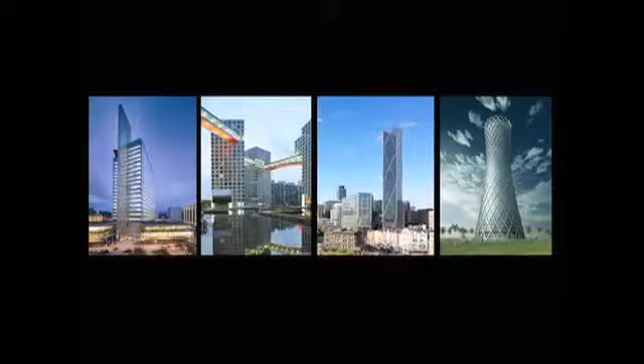The final session of the day was focused specifically on the council itself, with reflections from past CTBUH chairmen and presentations from the 2009 Best Tall Building Award winners.

2009 marked the CTBUH's 40th anniversary since its founding in 1969. This was celebrated at the conference with a special panel session in which six past CTBUH leaders presented their reflections on their experiences with the council. A common thread across their presentations was the fond memory of CTBUH founder Lynn S. Beedle.

First to speak was Leslie Robertson of Leslie Robertson Associates, who served as CTBUH Chairman from 1985 to 1990. 'Indeed, my memory focuses on but just one central remembrance - that's Professor Lynn S. Beedle. Lynn created the council and did so from nothing more than his own dreams, his own energies, and he dragged us, often kicking and screaming, into the far corners of the world, thus providing a sort of technological education or transference of information about tall buildings.'

Charles DeBenedittis shared his early memories of the council, including one of the late Fazlur Khan, who was CTBUH Chairman from 1979 to 1982. 'Dr. Beedle's energetic leadership continued for 30 years until 1999. Many chairmen served the council and are listed elsewhere, but I must make mention of Dr. Faz Khan, who died much too young, soon after serving as chairman from 1979 to 1982. I will always remember the ovation he received in his sentimental closing at one of the 5-year council meetings in New York City at the end of his tenure.'

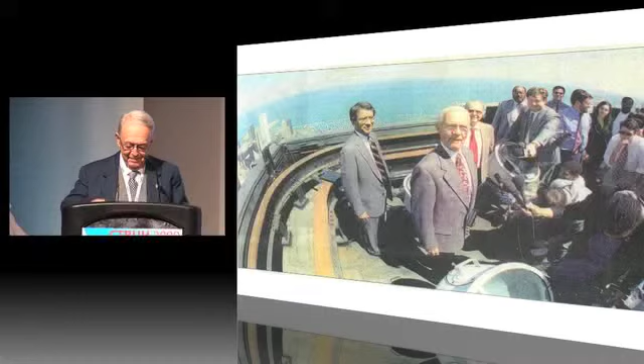Gilberto Do Valle, past chairman from 1993 to 1996, shared an image from the top of the Sears Tower, recently after it had controversially lost its title as the world's tallest building, thanks to a council ruling. 'This photo has been taken at the top of Sears Tower, just after I passed the gavel to Shankar Nair. By that time, the Chicago community was disappointed with the fact that Petronas Tower had surpassed the height of Sears Tower with those pinnacles, and they could not agree with that.'

Shankar Nair explained how he had seen the council grow beyond just a structural engineering group that it had started as. 'By that time, the council had been transformed into much more than just a structural engineering group. That's what it started as, but it became much more, and it was supposed to be. In fact, the tall building focus had been broadened to include not just the building itself, but also the habitat, the whole environment in which the building existed. And it had become recognized as an international and multidisciplinary group. In fact, it was the only international multidisciplinary group involved with tall buildings in the world.'

Ron Klemencic became chairman of the council just after the events of 9/11, and he shared with the group the story of what sparked him and the council into action at a time when the appropriateness of tall buildings was called into question. 'One of the fond memories I had was after 9/11, a couple of days after, I had just taken on the chairmanship, as Shankar had pointed out. Of course there's all the press going on, and my phone rings, and it's Nadine Post from ENR. And she reminds me, you're the chairman of the Council on Tall Buildings - what are you going to do? And I was so taken aback by that. What am I going to do? What are we going to do as the council? And it was that phone call that inspired a whole bunch of activity in the ensuing months, leading to many meetings and ultimately some publications that the council put out.'

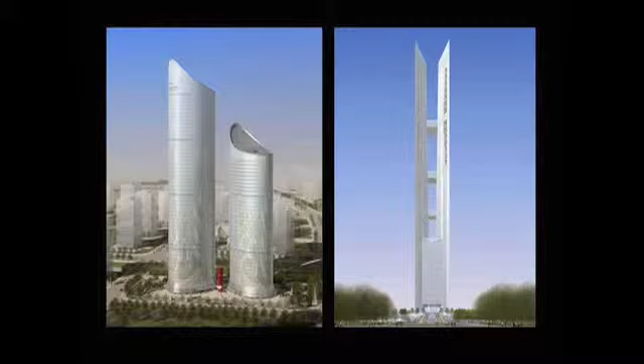'And then it hit me that really what architecture is all about, what development's all about, what building's all about, whether they're short or tall, is really about people. And I began trying to understand how people respond to environmental circumstances and how you could make things happen and put them together in such a way that it was a greater contribution than the building itself.'

'The current momentum surrounding tall buildings is mostly about the thing itself. There's nothing wrong with that because I'm very interested in that. But the thing is a form, and it has a structure, and it has a function. And we can build it - that's not the question. But can we make it a living community? Can we make it function? Yes. But it takes more than function to make a life.'

The social aspects and needs of human beings at the life level must always be part of our concern, if not our major concern. Lastly, the 4 regional Best Tall Building winners were presented.

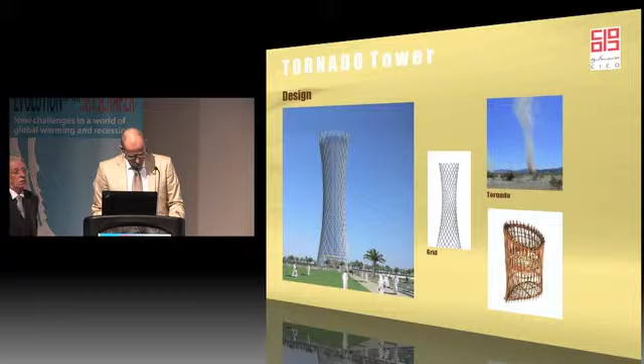The design team has placed emphasis on the exceptional location of the site and thus designed a building unique in design and suitable for the competing market in Doha. Resembling a whirlwind in the desert, Tornado Tower is a dynamic and fascinating spectacle in the skyline of Doha. The Islamic geometric pattern of the structural shell reflects the modern approach of Doha to the future architecture of the city.

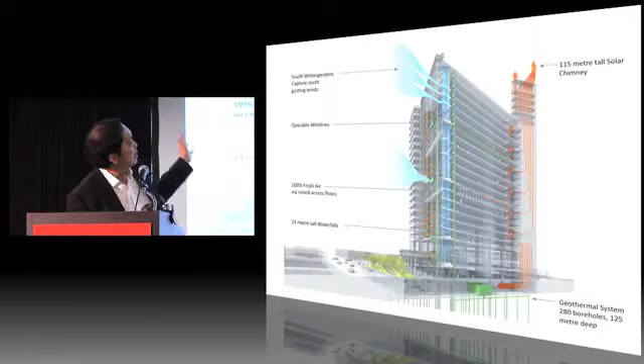A great diagram that we finally got to really understand what we're doing. We have decoupled heating and cooling from ventilation. It's a concrete high-rise building. We have the largest geothermal application in the country, 280 holes drilled to 400 feet depth at 15-foot centers under an urban site. There are 1-inch diameter pipes in the concrete, 10-inch concrete slabs, and the slabs are kept at 20 degrees Celsius year-round, no matter whether it's minus 30 or plus 30.

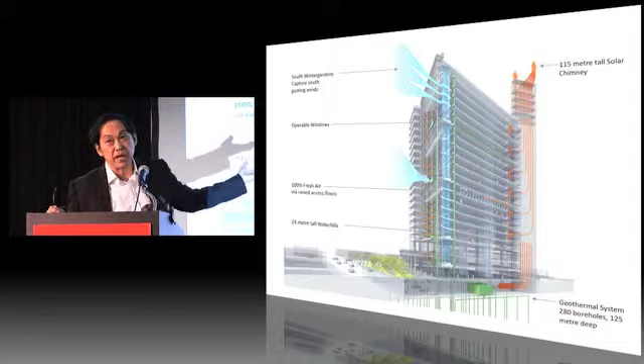We have 100% natural ventilation coming in because of the south prevailing winds into those atriums. It stratifies, we have rises. We have 100% raised floor, so it's displacement ventilation. And we have a very high performance building envelope. We have windows that open. We have basically buffer walls on the west face and the east face, and everywhere else it's triple glazed primarily. And then you see the solar chimney, which drives the ventilation system.

So air comes into the atriums, sometimes preheated if it's minus 20. It goes into the raised floors, it stratifies, it hits bodies, it warms up, and is drawn across the building to the solar chimney. We have a passive preheat function in the top of the chimney, which is basically a whole grouping of hollow section steel tubes with sand in them. That's passive preheating. They're painted black.

And it becomes the icon. So when people were talking about spires and heights, ours really drives the environmental systems of the building besides being the tallest part of the building.

Here's our performance. That building, we're shooting for a 60% reduction in energy consumption from the Model National Energy Code building standard, and we're actually achieving the target. We're achieving it in a way that will drive our energy usage down below 90 kilowatt hours per square meter per year, when most buildings in Winnipeg and around most of North America are like 500, 600 kilowatt hours per square meter per year. This is really big and really green.

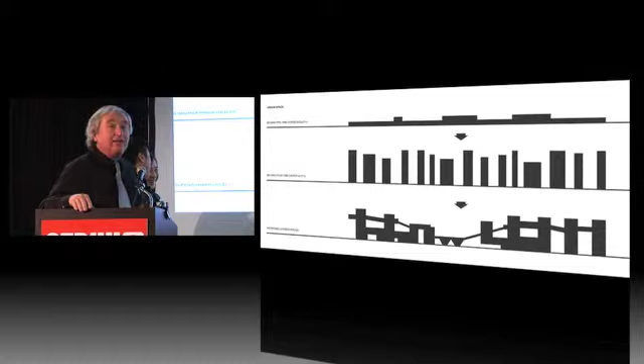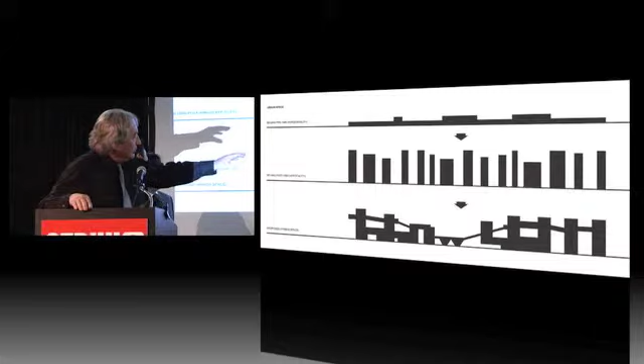Basically, the premise is that Beijing is a city that was once horizontal, and around 1949, Mao lifted the restriction that you couldn't build higher than the Forbidden City. That means you could start building towers. But Beijing is becoming a city of point towers, and many of them are gated communities. This is wrong, we feel, and we want to make some kind of horizontal city that's much more socially connected and socially defining space. That's a key core drive.

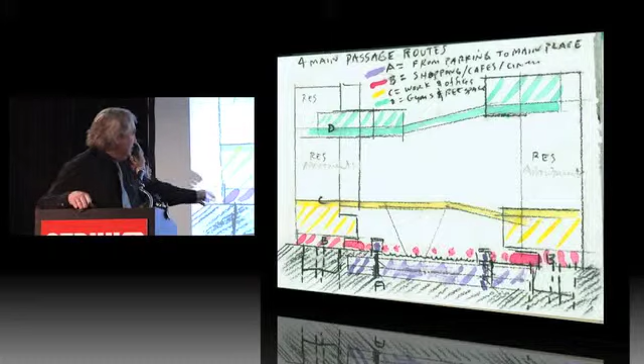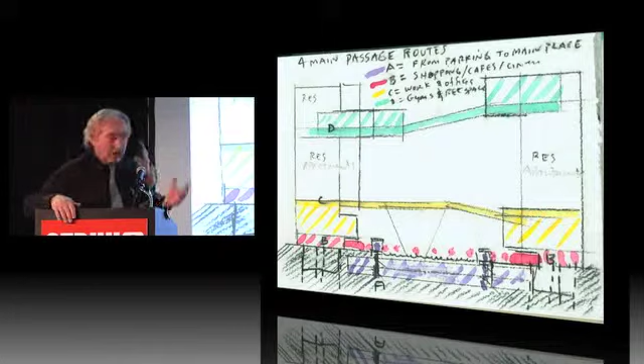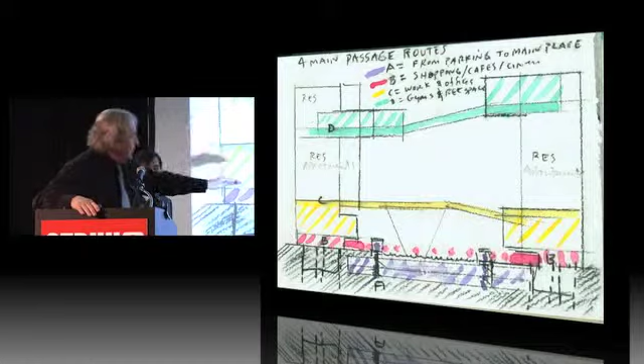So this was the first sketch, and that is the idea of on the street, shops, and a secondary level, maybe offices, and a third level. This is very different than the problem of, let's say, Minneapolis and skybridges. There's so much density in Beijing that you can have plenty of shops on the street, and our idea of porosity of the street is very important. But you could also have activity in the air. It's not to take away the activity on the street. In fact, we feel very strongly urbanistically the street activity is key.

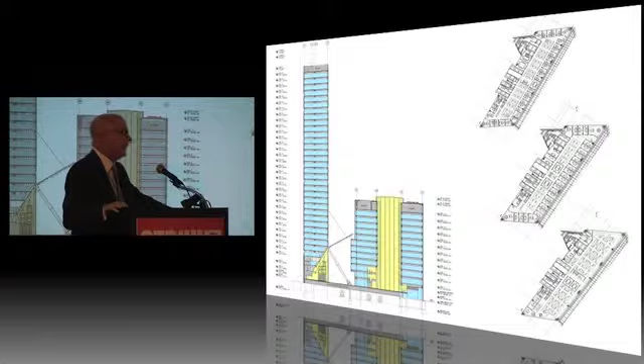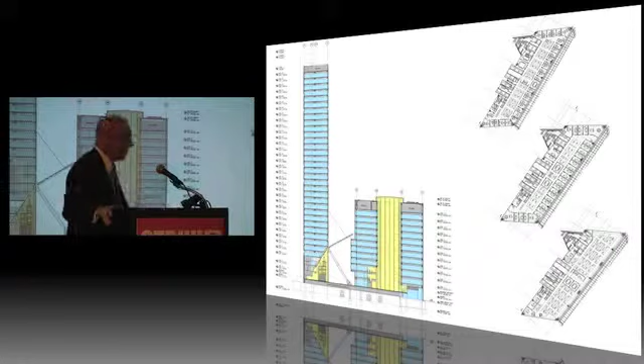However, after it was constructed, we came up with the idea of putting a tower on there, and the challenge was really finding a way to take all the load which the raft was designed to take and move that somewhere else. And thereby came the idea of this transfer structure, which bypassed the raft entirely underneath the tower footprint and gave rise to the center galleria space between the tower and the low-rise building.

In between the two buildings is a large public space. Again, a lot of care was taken to give public space back to the city. The site itself is about 2.5 acres. More than half of that site was given back to the city as a means of public space. It also created a vital link from the transportation hub of Liverpool Street Station to the emerging districts of Shoreditch to the north.